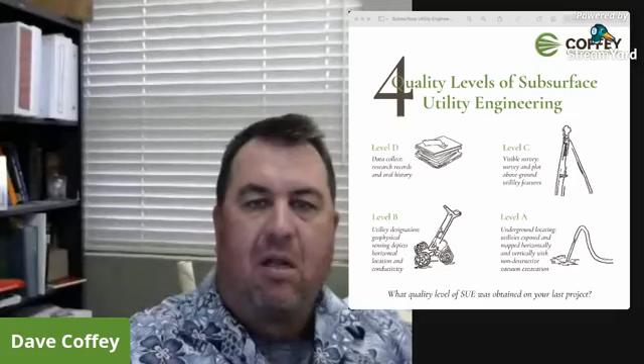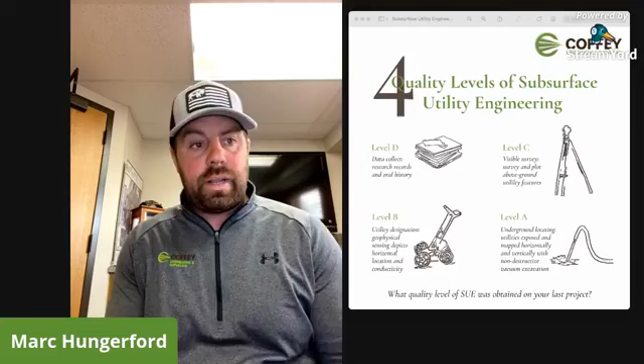Well, the quality levels all pertain to something that I would do. I don't particularly do the engineering side of it. I provide all the data from the field. So the utility locating itself has separate levels from D to A, A being the most intense, which is exposure to utility, and to get to level A, you've gone through D, C, and B.

Quality level D all pertains to records research. Basically, you're contacting utility owners, municipalities, to see if they have infrastructure in the area, gas lines, water lines, underground power, fiber, anything of that sort. That way you are starting to get an idea of the depth you're going to have to go into in your investigation to find everything in the area.

And so you start with D to get your records and research, move on to C, after you've obtained all the records that you can obtain, because, believe it or not, some entities do not have records. They have a knowledge of it, but they don't specifically have a physical record of, yes, we know there's a line here. They know that they've serviced it in certain areas, but they're not 100% sure.

So we go from level D to level C, which after you've obtained all those records and you've identified utility owners that may have infrastructure in the area, you're looking for surface evidence, anything from visible markers to a trench that has settled over the years that you can tell there's something there. You're physically out in the field looking for that surface evidence.

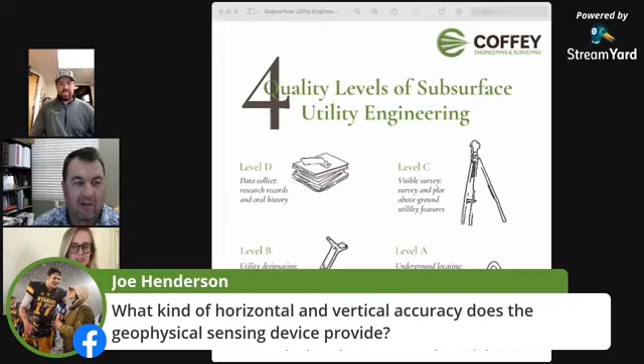Hello, Joe. Good to hear from you. Marc, tackle this one. Thanks for the question, Joe.

So, typically in my side notes with any of the proposals I would submit, with any of my electromagnetic conducting, I would tell you plus or minus a foot. With my GPR, the ground penetrating radar, there's a lot of factors that go into it, but dependent on utility type, size, soil, we can provide accuracy levels in the 4 to 6 inch range. If you need something more than that, level A non-destructive exposure is the only way to go. But for GPR, in the perfect conditions, 4 to 6 inches.

With the electromagnetic, like my Leica DD130, if you want a rough idea, I can tell you, oh yeah, it's 18 inches deep. And I understand, if I tell you plus or minus a foot, that's a broad spectrum, but it just gives you an envelope for where it's likely to be. Well, thanks. That sounds pretty precise to me. So the range is around 4 inches on the shorter side and a foot on the longer side, you think?

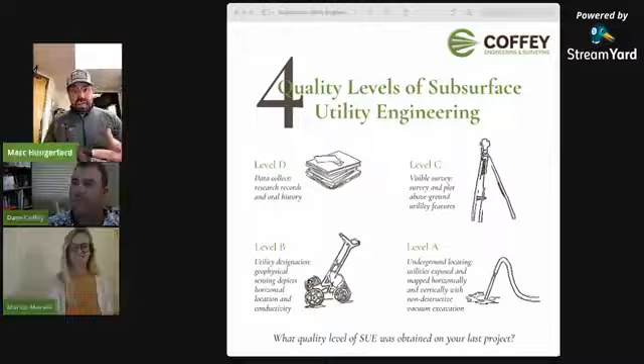I want to say it's Colorado SB 18 something. I can't quite remember. I'm trying to pull it up here, but yes. Okay. And a lot of it's dependent on the end user. Right. If they tell us, well, quality level B will suffice until we go forward with a design, or like certain lighting projects that we've helped on, we've gone through quality level B, and then the installer at the end has a hydrovac truck, or they're going to expose the utility before they do the installation.

Other clients have said, hey, no, we want to go all the way to A, and we want you to find it, we want you to expose it, we want precision vertical, and by doing so we have to go to level A. So I don't want to say it's not required, because I can't find the actual bill here. So it depends on the project, and then it depends on the end user. So in some cases, there may be a required quality level to be achieved, and then in other projects, it's simply just a preference. Correct.

Got it. Okay. And most of the time, and who's out there listening, I'm sorry if I speak wrong here, but most of the time, what we have seen in Colorado specifically is that they do ask for a price all the way to quality level A.

And in a few of the instances that we've worked with individuals or municipalities or whatnot, we've submitted prices for up to quality level B and additional with the quality level A, and they've made the choice that, okay, well, let's go to B, and then when it comes time to installation, or when we get ready to move forward with it, we will go ahead and expose to quality level A. So it's dependent on the end user most of the time.

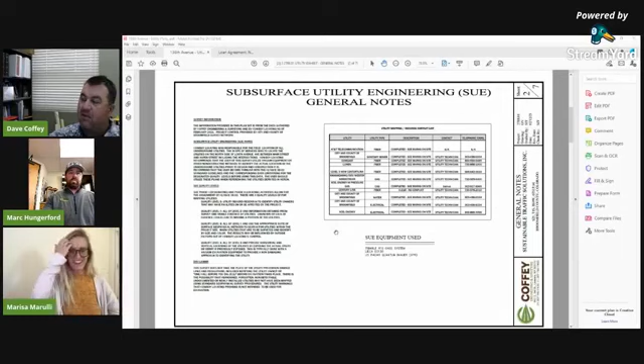Well, wonderful. So now we could talk about, do you all have any projects for us today, Dave or Marc? Any projects we can review that we've been working on? Sure can. I believe if Joe Henderson's still on, he might recognize this one. Okay, I see your screen, Dave. There we go. So this was a report that we did with Joe, correct, Marc? Yes, sir.

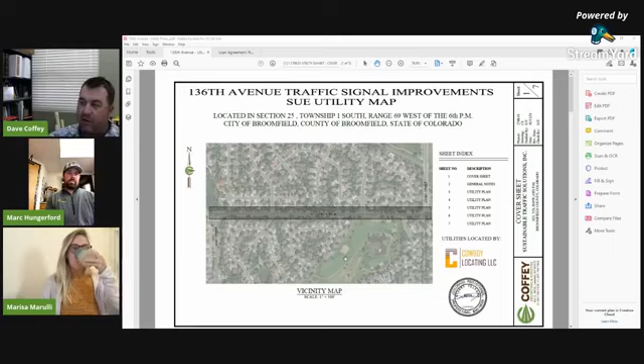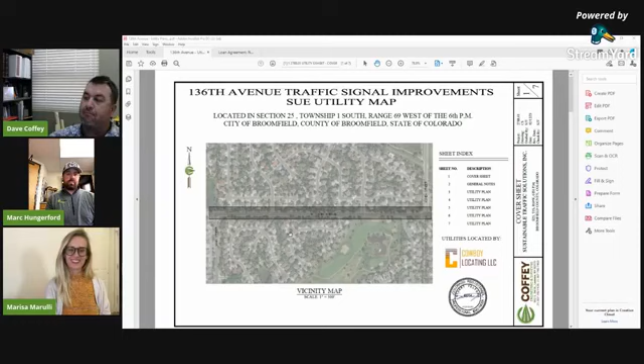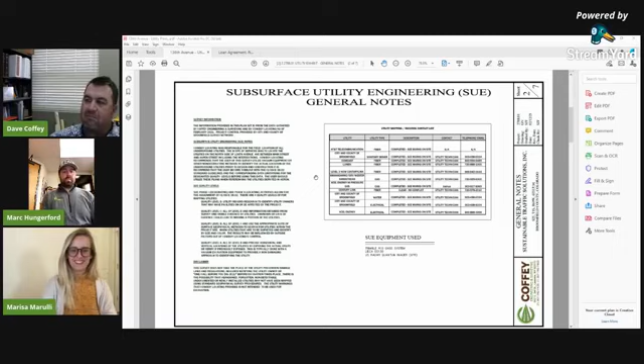Joe's a traffic engineer and was working with the city of Broomfield and used our information to do some engineering design work. Our task was to do a SUE investigation for a portion of 136th Avenue. Here's the cover sheet. Accompanying this are several notes, including weasel words to keep us out of liability, along with a lot of details for who the utilities belong to, what quality level was used to map these utilities, that kind of thing.

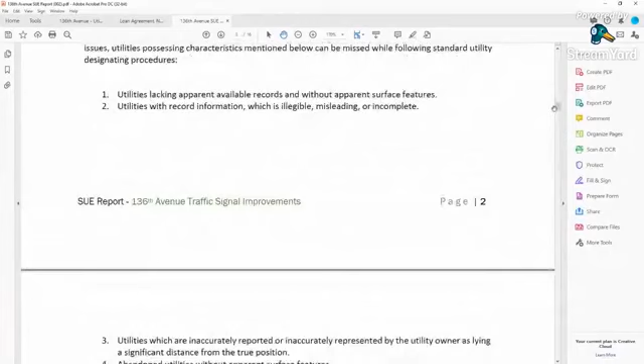There's also a report that goes with this. That's part of it. Let me pull that up real quick. This is the report that goes with the exhibit, the drawing, that talks about the project scope, the utility locations, the ownerships, description of the utilities, where the utility information came from, the process, and the data limitations. So this is all kind of a supplemental document to the exhibit.

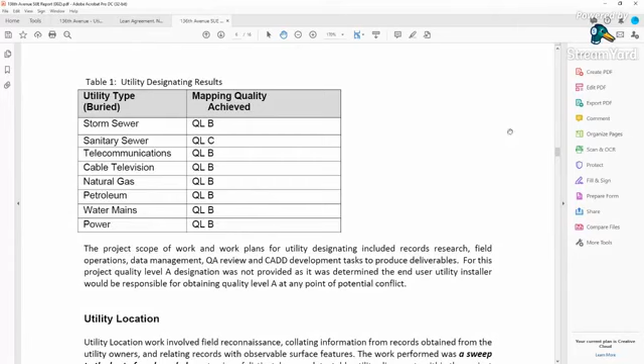As you can see here, we talk about the quality level that was used to provide location information for these particular utilities. But the end result is a deliverable that the engineer or the municipality can use to understand where those utilities are within the specific corridor that Joe and the city of Broomfield are interested in doing some design work in.

Wow. Okay. So that is the map right there. That looks like the gold mine of the project, where all of those colored lines are various different utilities that you found. So it's a complete mapping of everything around that area, and now they know where all of that is and can work around or with that information. Correct. Marc, wasn't there something interesting about the water line that was here? Not on this one. Not on this one? Okay.

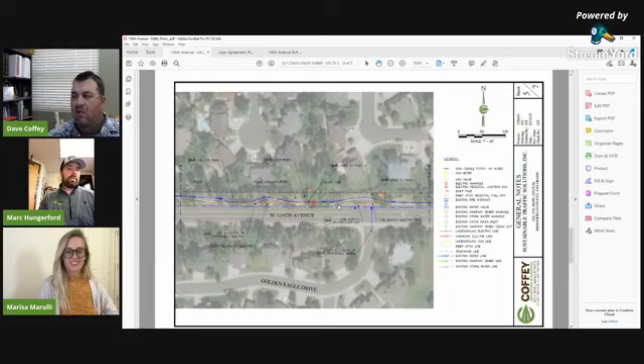The interesting part of this one was none of us realized that there were that many utilities on the north corridor of that right of way. Did you look at the south corridor as well, or just the north line? It was moved to the north. Everything was moved to the north? Correct. Wow. So there's a lot of detail that needs to go in there.

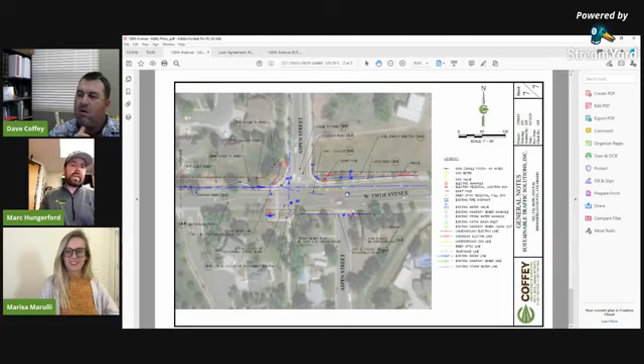What was the end result of this project? What kind of a project is this for? It's a traffic signal expansion. They were using fiber to interconnect traffic signals. They were adding signals in. And yeah, so it's real important to understand where the existing utilities are, so that whoever's going to install the new fiber optic line understands where to put it, so that they're not digging up existing utilities.

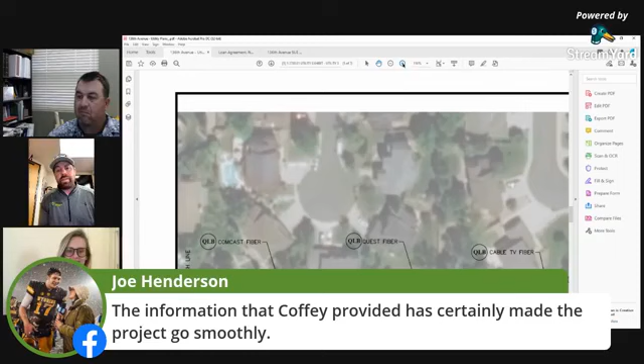And so, as you can see, if you're looking at this screen here, thank you for that, Joe. If you're looking at this screen here, you can see how busy some of this stuff gets. I don't think a vast majority of the population understands what is underneath them. At that zoomed out location, it's hard to understand really what's in the ground. So what's here?

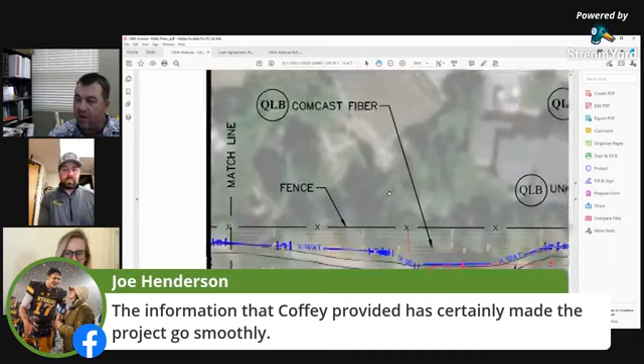So on that specific page you're looking at right there, you have 5 different fiber lines. You have a gas line, you have a power line, you have an existing water line, and an irrigation line. All of that runs down that corridor, which is roughly 75 feet wide, maybe, from back of curb to fence line, which is property line.

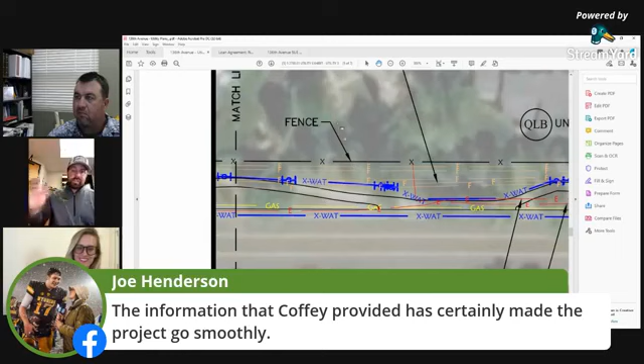And then behind that fence line, which wasn't our concern, but we had to hook onto some of them, there's another corridor of utilities there as well. It's a 5 foot wide corridor that runs the length of the property there. That's jam packed full of fiber and power as well.

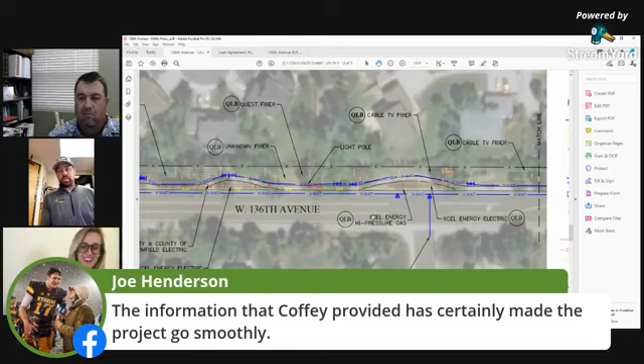So, as you can see here, some of this stuff, especially in these areas down in the Front Range that are growing just out of control. That's not a bad thing, but there's infrastructure on top of infrastructure on top of infrastructure, and for instance, for this project, just popping a bore in the ground and going wasn't going to suffice.

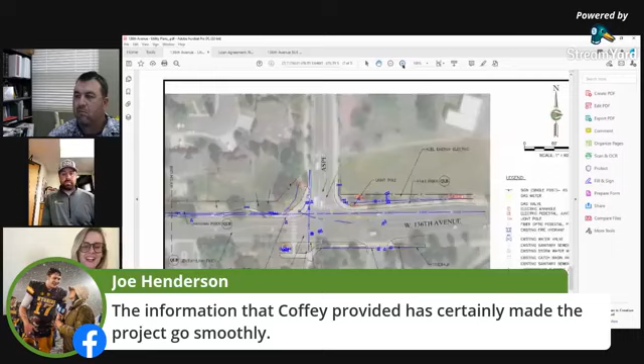Yeah, and I actually have a question. If you can leave that visual up, with all those utilities mapped, Marc, can you talk a little bit about the quality levels, if you can remember just from looking at this visual? Really, my question is, how much of this was able to be seen with the eye, kind of that quality level, versus how deep did you have to go through the quality levels to get this information?

So this entire project was, with the exception of the sewer, the sewer was quality level C, because we would use inlets and manholes, take inverts at those manholes. We never physically pushed a line through the pipelines or anything. We used manhole to manhole. So it's considered quality level C because we never physically located the pipe in between manholes.

The rest of these utilities, visual on the landscape, there's boxes for the telecommunications. There's electrical junction boxes that are visible on the surface. There's blow-off valves for the irrigation lines that are visible on the surface. There's water valves for the main lines that you can see in the street or on the curb, the cast iron valves, I think they're like an 8-inch diameter valve cover. A lot of that is visible.

In between the fiber pull boxes, there's no evidence. There's landscaping, there's trees, there's sidewalk. Same thing with the power, with the exception of light poles or the junction boxes or pull boxes, or the traffic signals that were on the west end of this project.

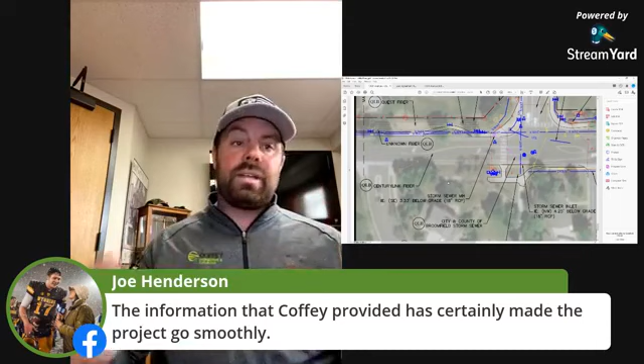So either that, or we can hook on to, say, a ground wire and push a signal through it, where we have a box that is pushing a signal through that ground wire, and we're using the other end, the wand, as we call it, to detect that signal as we go in between junction boxes.

And so, as for physical evidence, yes, there is, but as being able to show what is going on underneath the ground just by standing there and looking, not much. It was a spider web, and a lot of them walked over each other, and without being able to do what we can do with the technology we have, there's no way you could have known what was there.

Wonderful. And it sounds like Joe Henderson was, so was he the client on this project, would you say? He was the design engineer, the traffic. So there's a traffic signal construction, and Joe was the traffic signal engineer on this. And all of the data that we provided to the city, Joe took, so he could do his design so they could implement traffic signals at the far east end of this project, because they were interconnecting.

The west end of the project already had existing traffic signals and fiber, and they wanted to run it down, I believe it was a little over half a mile, to the other intersection and put traffic signal lights in, new signals. There are no signals on the east end. And they wanted to interconnect them so they could control them from one central hub. And the data that we gathered was turned over to Joe, so Joe could do the actual engineering design on the project.

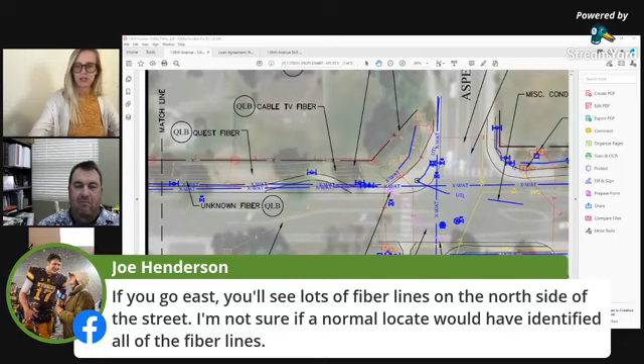And you can see he says, if you go east, you'll see lots of fiber lines on the north side of the street. I'm not sure if a normal locate would have identified all of the fiber lines. And he also said that the information we provided has certainly made the project go smooth. So thank you so much, Joe. We are very grateful for your partnership in projects.

So anything else, Dave and Marc, on this project? It just sounds like it was a successful outcome all around, and that it was very helpful for Joe to continue to do what sounded like a pretty complex job ahead of him. Yeah, it sounds like it was a good project, and we ended up giving the city of Broomfield and their engineering team, Joe, some information to help limit their

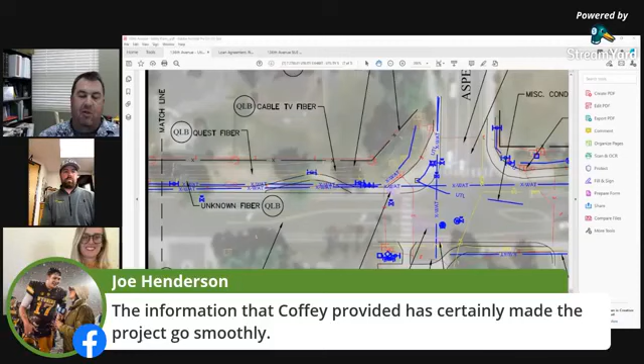construction costs. When there's unknowns in construction, those things oftentimes create additional costs, and by the sounds of it, we're probably going to end up, through this work, helping save the city some money, and that's really what it's all about. Saving money on the back end, because if you have unknowns during construction, that's when costs escalate.

Yeah, I grew up in a way where I really am a firm believer in doing things right the first time, because if you don't, you end up just spending more money patching over, fixing, redoing. So it ends up being more cost effective most of the time, in my experience, to just do things right the first time. Sure does.

Well, anything else that you all want to add, Dave or Marc, or do you feel like we've covered subsurface utility engineering and locating pretty well today? I'm not sure what else there is to say about this. Maybe just a shout out.

The work that we do with SUE engineering is a collaboration between Coffey Engineering and Cowboy Locating. Cowboy Locating is a sister company to Coffey Engineering, but wholly owned outside the company. So we're not affiliated directly with Cowboy Locating, but Cowboy Locating provides all the field utility locates. Coffey Engineering provides the professional surveying and engineering services that go along with the actual SUE reporting. So it's a good partnership, and Coffey Engineering's happy to have Cowboy Locating and Sustainable Traffic Solutions, Joe Henderson, as good clients and partners.

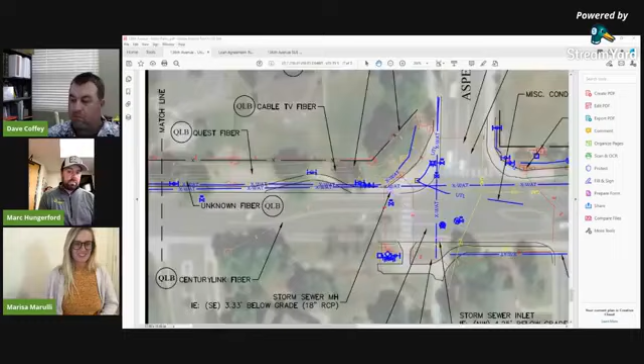That's wonderful. And so who would someone call if they are looking for some help in this area? Would it be Coffey or Cowboy Locating, or would Coffey be a great first start? I think you could certainly call Marc Hungerford or Ty Harriet with Cowboy Locating, or you could call Coffey Engineering's office and ask for Mark or Stuart or myself if you're interested in our services. We use each other all the time. So if I get a phone call about a SUE investigation, we immediately reach out to Coffey with Cowboy.

Now, I am a part owner of Cowboy, and I work for Dave at Coffey Engineering, and I have for like 15 years. But when somebody reaches out to me at Cowboy Locating and says, "Hey, we need to do a SUE investigation. We need to get the ball rolling on this. I need a cost, start to finish," I'm not a professional engineer. I don't employ a professional engineer at Cowboy. Dave does, however, employ quite a few professional engineers. And so I turn around and reach out to Coffey, and we move forward with that.

If Coffey gets a phone call that says, "Hey, we need a SUE investigation, or we need utility locating done," they in turn say, "Well, you need to talk to Ty Harriet or Marc Hungerford at Cowboy, and we can get the ball rolling on this end." So we work hand in hand with each other. So anybody you get a hold of, if it has to do with utilities or SUE investigations, or subsurface utility engineering, either one of us, because we're going to reach out to each other.

Sure. So it sounds like there's definitely a marriage between the two businesses, and the people that make up the businesses are right next to each other, talking every day. In fact, you're in the same building right now, aren't you? Just down the hall from each other? Across the hall. I could hit him with a pin.